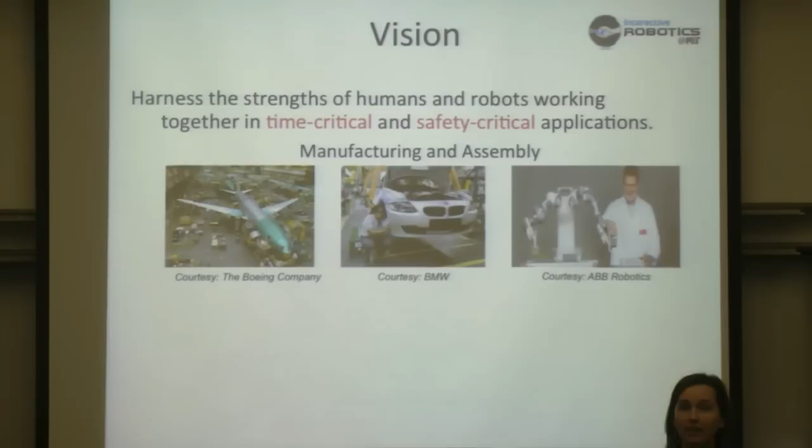What we do in my group is algorithms. We do planning, decision-making, and control algorithms. And what we specialize in is how we modify those algorithms so that these robots work more effectively and more naturally in an interdependent fashion with people. And so we do our work in two primary applications. The first one, which I'll be talking about today, is in manufacturing and assembly. This is integrating robots onto factory floors to work with people to improve the efficiency with which we build large commercial airplanes, do final assembly of cars, as well as smaller assemblies such as electronics.

And the other main area we do work in is in reducing the burden of deploying robots for disaster response applications. And today I'll focus primarily on the manufacturing and assembly applications because what's happening in this space is wild. When I tell people I'm doing work in industrial robotics for manufacturing, people typically look at me in one of two ways. Either their eyes glaze over and they say, we solved industrial robotics in the 80s or before, and there's nothing going on in this space. And the other half of the people see what's happening here, as many of you do here as well. And what I want to do is tell you about the special challenges and the incredible opportunity here.

So who has seen or been in a factory? What sort of factory? The automobile industry, okay. And if you were to guess which industry is the most successful at deploying robotics and automation, it would be which industry? Okay, the automotive industry. What was that? Ballpoint pens. Oh, so it turns out things like placing chocolates. I mean, about 90% of the work of placing chocolates into little cups is done by robotics today.

The automotive industry is typically thought of as one of the more successful industries at deploying robotics and automation. A little known fact is that only about half of the work done to assemble a car today is done by robotics and automation. The other half is the final assembly of the car, so that's putting in the seats, the insulation, the wiring, and that half takes up half the factory footprint and half the build schedule. There are a number of other industries that are lagging further in the introduction of robotics and automation.

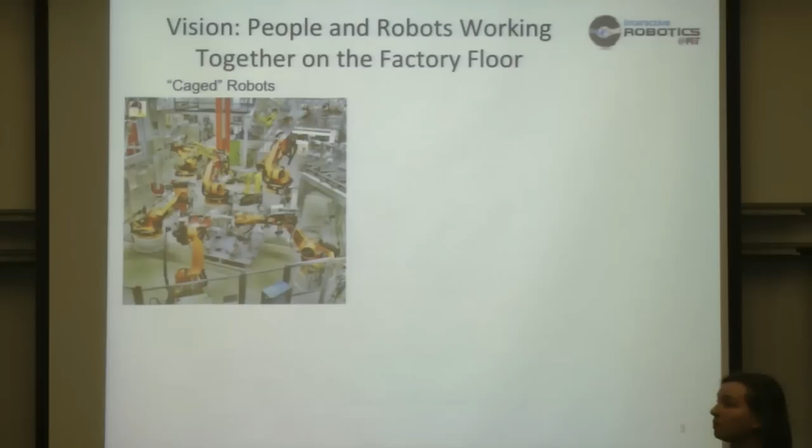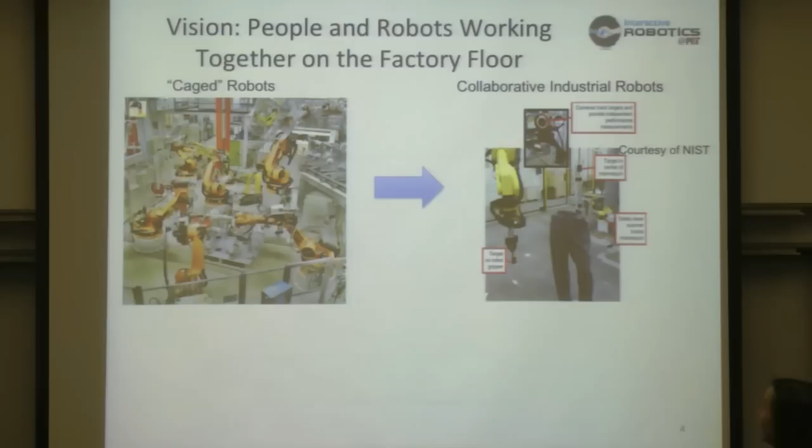Factories of the near future are going to look very different than the factories we're used to seeing today. One of those reasons is that we're beginning to see safety standards and technical specifications to, I kid you not, put these large, dangerous industrial robots onto mobile bases and rails and have them move and work in the same space as people. We still need to maintain safety, but rather than doing that through a physical barrier, we're doing that through sensing and computation. So we sense people in the space, and we slow and we stop the robot as a person approaches it. So this is an exciting new trend in uses of what are standard industrial robots.

At the same time, we're seeing the development of a fundamentally new type of industrial robot hardware, and these are being called inherently human-safe robots. I prefer the term mostly not dangerous because they can still hurt you. But the idea is that they can work next to you, elbow to elbow. They can hit you without permanently harming you in any way and without that external infrastructure of the extra sensing and the extra computation to make this safe.

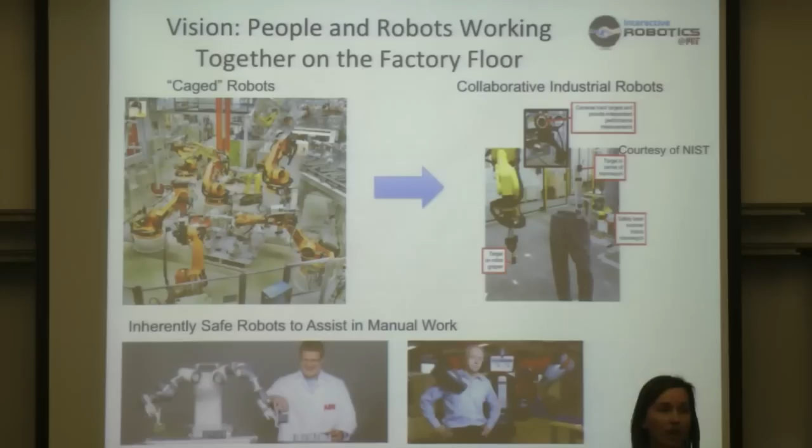So what I'm interested in is not how we make these systems safe, because that's ongoing work, but how we can take maximum advantage of the new flexibility afforded to us by these systems. Given we're beginning to understand how to do this safely, how do we deploy a robot? How do we task it, schedule it? How do we enable it to learn about how to work with people in a way that meets the safety standard, but improves the efficiency of the interaction? So that's the goal.

We work on this problem at two levels. One is at the higher level. How do we do dynamic sequencing and scheduling of work across a factory, where some work is done by people, some work is done by robots, there's precedence constraints. And wherever we have manual work, we have process time variability. People don't always do things the same way or in the same amount of time. On the other hand, we also have a challenge of how we put robots to assist in manual complex tasks more on the elbow-to-elbow side.

And what I'm going to do is talk about these two levels, one at the factory level and one at the human-to-robot one-on-one level, in terms of how we can support three facets of teamwork, three elements we know that make highly productive and effective human teammates. So what we want here is we want to be able to develop robots that can coordinate to adapt to disturbance in these environments, with the understanding that humans are the ultimate uncontrollable entity. We can't control what they do, so we want to be able to adapt.

A lot of the work that's done in these domains is codified through procedures, but much of it isn't actually. And I'll talk a little bit about that, about my observations out at Boeing. And what we need is a way for these systems to extract implicit domain knowledge from the human teams, from the environment, in order to be able to work more effectively with humans. And we also want them to be able to learn team fluency through experience and practice, so get better and better as they develop better statistical models of how humans behave.

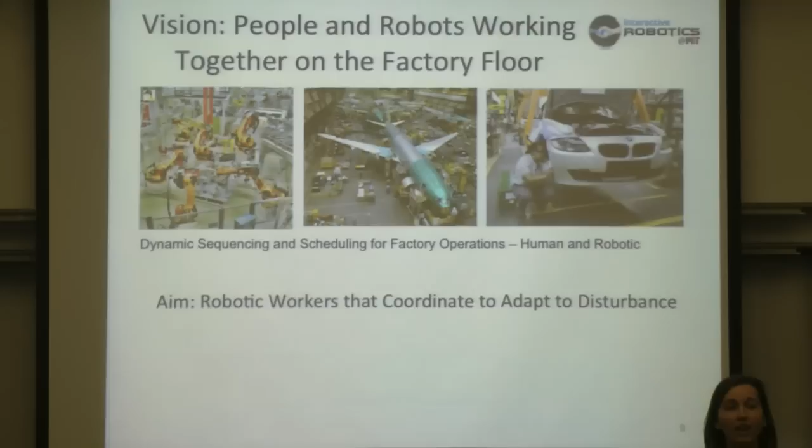So we'll start with the first one. How do we develop robot systems that are able to coordinate to adapt to disturbance? This is a computational challenge, what's underlying this. And the motivation for this is, why do we want to be able to have robot workers that adapt to disturbance? Well, ideally, if we want a factory out at Boeing to look more like most of the automotive factories we see, we'd want to replace all of these human workers with robotic systems. The truth of the matter is that's a long-term goal, 20 sort of plus years. In the intermediate time, we can begin introducing robots to do some of this work.

But the people are not keeping to a fixed schedule. So when a part is late, when rework needs to be done, people talk to other people to decide how to continue on. What we have here now is an integration issue. We have people changing the sequence and scheduling of the factory work. And what we need are robots that are able to take as input those changes and adapt their own sequencing and scheduling in response to these changes.

And so what we want is to move away from the systems we currently see, which are multi-robot cells. When a person needs to come into the cell, that entire cell is shut down for the duration the person is in it. What we want instead is for a person to be able to request to come into a certain space for a certain amount of time. For example, say I need the left half of the fuselage for a half hour. And what we want is for the robots to take in that constraint, to retask, resequence, and reschedule their work so that they can still continue to make progress despite this unanticipated disturbance.

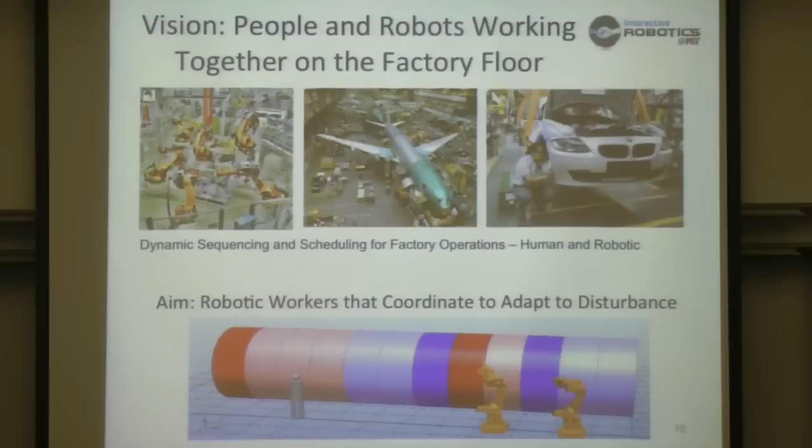So what are the real-world near-term applications for this? I can tell you about a few in aerospace manufacturing. So this is an industry where, as I mentioned, maybe 70 or 80% of the work is still done manually. That remaining work that's done by automated systems is typically done by what's called monument automated systems. They're called monuments because they're huge structures. They take up a large part of a room. They're fixed to the factory floor, and the parts come to them. And so these systems are used for drilling large aerospace structures and for composite material placement.

Drilling is a big deal in aerospace. A 747 requires 1 million holes to be drilled during assembly. Much of that is still done by people. When it's not, it's done by the system. So what we're seeing is a trend moving from these monument systems to more right-sized, reconfigurable robot systems. So these are robot manipulator arms with highly specialized end effectors, and they can move to the part. And what's nice about this is we can now get multiple of these robots on a wing or on a fuselage laying down composite material placement or drilling.

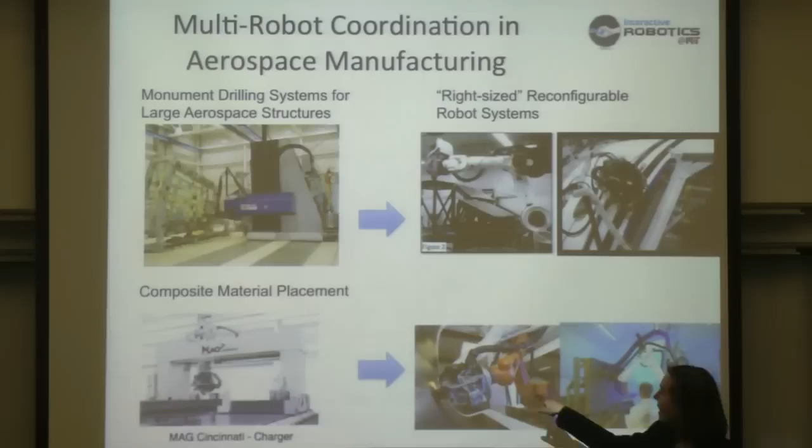One of the challenges with this technology: the robot arms never break, but this here tends to, it's newer technology, people need to come in, quality assurance needs to come into the space, so the interruptions are frequent. What we want is a system that's able to dynamically recompute task assignment and schedules in response to this input from supervisors or operators that want to change the schedule. And the proprietary methods for relatively small multi-robot cells may take a half hour, an hour, or multiple hours to recompute these schedules. And that's OK if it happens occasionally. But when it happens multiple times in a shift, we have a problem. So what we want are faster techniques to be able to compute these task assignments and schedules.

We want to be able to take as input a temporal plan, which involves the tasks to be executed, expected times that they take, minimum, maximum times that they take. We want to be able to take as input precedence constraints. One task or process needs to happen before another. Typically, there are temporal constraints as well, upper bound and lower bound temporal constraints. An upper bound window that certain work needs to be done in first shift or within a certain time a tool is available. We typically have lower bound temporal constraints as well, called wait constraints. An example of this is we need to wait a half hour for one coat of paint to dry before we lay down another coat of paint.

And we have different agents, different robots, which can perform the different tasks, as well as a spatial configuration at which the different tasks are performed. And we typically have space-based constraints, such as spatial proximity constraints. People and robots can't be too close. Two robots can't be working in the same area at the same time. What we want is to be able to optimize this work-sharing problem of this multi-robot system as a function of completion time, information on robot reliability, history from previous runs, and changing input from the human operator.

And the goal here is to be able to update the schedule quickly in seconds so that we can have a system that's more interactive and that can overcome these schedule disturbances. So this is a task assignment and scheduling problem. It can be readily formulated as a mixed integer linear program.

The challenge of coordinating multiple robots operating in the same physical space is that we have very tightly coupled constraints: upper bound constraints, lower bound constraints, and spatial constraints. These constraints are tightly intercoupled, and they don't really lend themselves to the typical techniques for scaling to large sizes, decomposition techniques. And that's because we typically can't get informative cuts through the search space.

The intuitive reason for this is that each agent's contribution to the objective function is coupled to the other agents' task assignments and sequences. So the particular allocation and sequence of one agent affects the goodness of the allocation and sequence of the other agents. And that's a characteristic of working in the tight physical space.

So UAV tasking and scheduling of aerial vehicles typically can use alternate techniques. You can decompose, for example, space and time. You can say within a sector, a certain agent is going to do work, and then let's sequence the work for that agent within that sector without it really impacting the work of the other agents. This is one example of a technique that won't work here. So what we observe is that in this problem, we need to leave time and space intercoupled, but we decompose the problem in an alternate way.

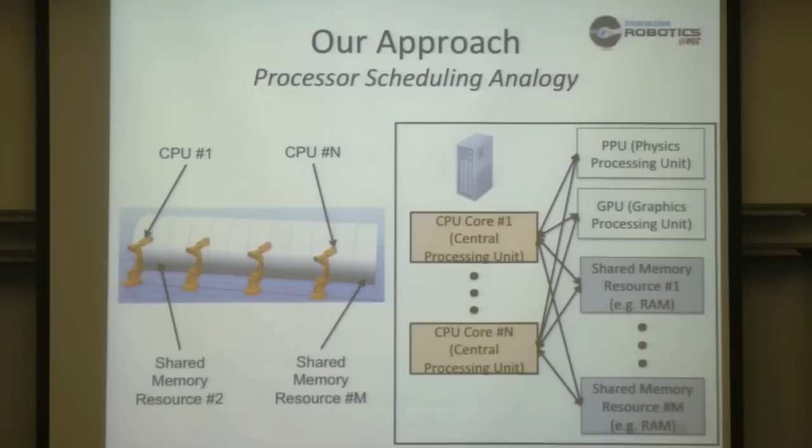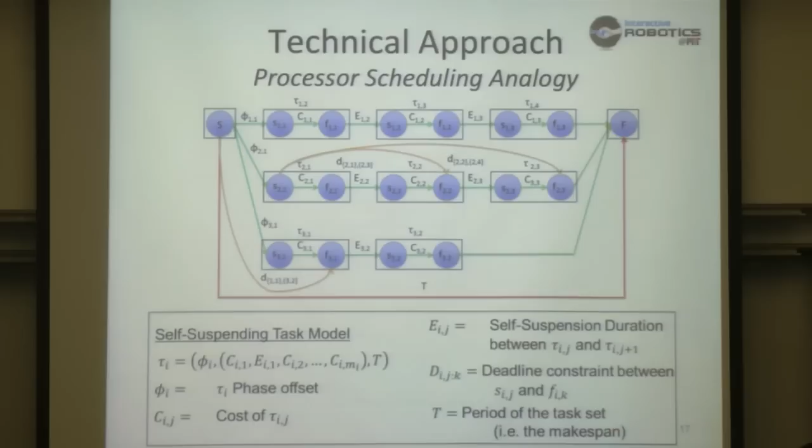So what we do is we map the manufacturing task to this self-suspending task model. And we aim to develop a polynomial time satisficing schedulability test for this task set. So what we want to do is put in this task set and get a very quick answer: yes, I can schedule it, or I don't know if I can schedule it. That's all we can get if we're going to do it in polynomial time.

The goal is to make this test as tight as possible, to reduce the frequency of times we get back this I don't know. And so this is a technique or an approach that others in processor scheduling work towards.

And this problem of scheduling or testing the schedulability of a self-suspending task network has been studied for restricted problem structures. So the way these techniques work is they restrict the behavior of the scheduler and then leverage the problem structure to be able to compute this tight bound. So you can restrict the behavior of the scheduler in multiple ways, but then you need to leverage the problem structure. So the particular problem structures that have been investigated previously and have been solved look like this.

We have one task, which is composed of a number of precedence-related subtasks, and then we have a whole bunch of free tasks. So our goal here is to figure out how to interleave each of these tasks within the wait durations of that upper task with its various subtasks. So you only have one task with subtasks, and then everything else is free, and that's your flexibility to try to figure out how to interleave and develop a tight test. So this has been solved.

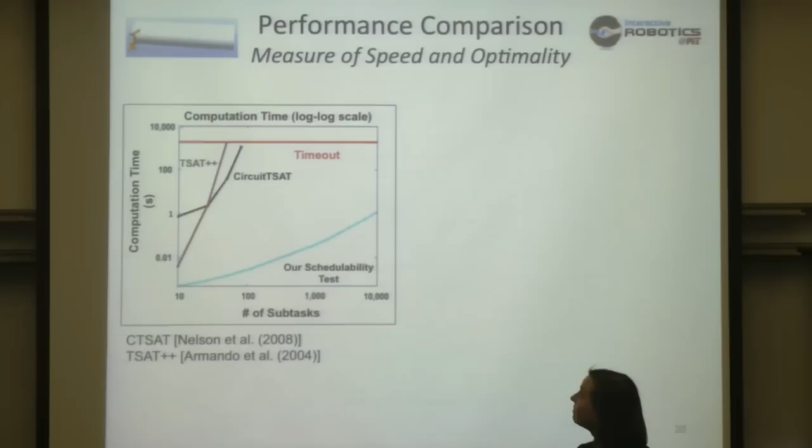So here we're benchmarking this schedulability test against SAT solvers, circuit SAT, TSAT++, just to give you a sense. Those are complete solvers. Typically, these will time out at somewhere around 100 subtasks. And we can test the schedulability of task sets with up to 10,000 tasks, usually in about a second. And to our knowledge, these are problems that were not solved previously. You don't get something for nothing, though. And what we lose here is optimality.

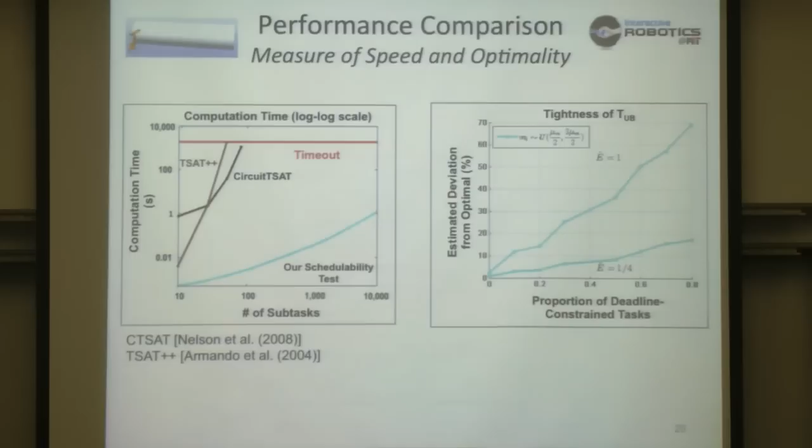So for this set of problems which we can solve optimally, for example, here the optimal is to minimize the makespan, which we have to solve using different techniques. What we can show is that if about 1/4 of our temporal constraints are these lower bound wait constraints. Remember, these are the hard constraints. If only about 1/4 of them are wait constraints, empirically we can achieve within about 10% of the true optimal, which is quite good for the applications of interest to us.

So now we want to extend this from a single agent to multiple agents. This is a single processor, no shared memory resources. So now we want multiple agents and we want shared memory resources. And this is doing a worst case analysis of all the interleavings. Once you extend this to multiple agents, it becomes highly conservative. So what we do is we take this schedulability test, we turn it into a tight schedulability test and embed it within a scheduling simulator.

So whenever we're about to make a scheduling commitment, we run this test and say, can we at this point make this commitment? And what that allows us to do is reduce the uncertainty with the commitments made so far and produce a less conservative schedule going forward. So what we do is we take this schedulability test and we embed it as a subroutine within a standard mixed integer linear program solver.

We use Gurobi for solving the agent allocation problem. We produce an optimal agent allocation according to a heuristic optimization function. We throw that to the sequencing subroutine. We say, can we solve it? If not, we iterate back to the next agent allocation. We go back and forth until we find one that meets our schedule constraints.

So when we put this to a multi-agent system, again, scheduling through simulation, what we're able to show is that we can schedule up to 10 agents. We've extended this out to 100 tasks, usually within about 10 seconds. All prior state-of-the-art techniques we've looked at and benchmarked against pretty much time out. Here we're doing a timeout of 30 minutes for 4 or 5 agents, about 50 tasks. So we can solve much larger problem instances.

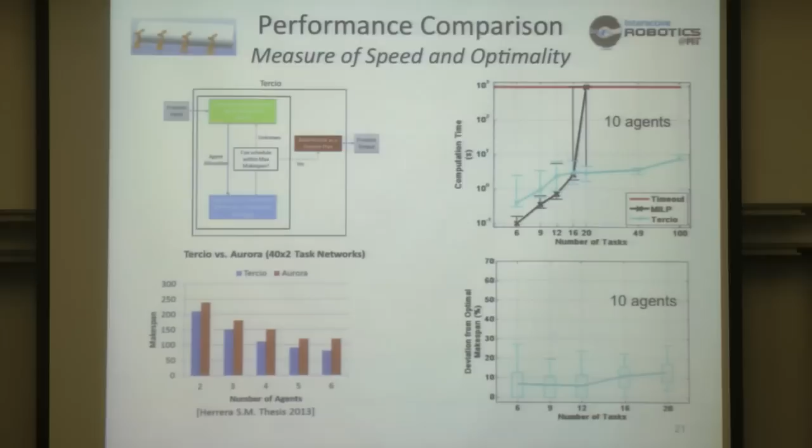And again, we can show for the multi-agent case, as well as for the single agent case, that we can produce solutions that are within approximately 10% of the optimal for the size problems we can benchmark against. We've also benchmarked this against proprietary solution techniques as we were able to. These are for smaller task sets. What we can show is that compared to other heuristic proprietary scheduling techniques, we typically produce schedules which are at least 10% better than these other techniques.

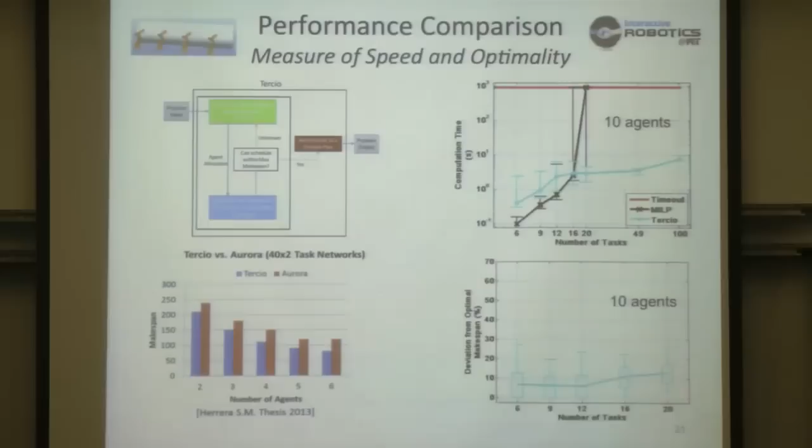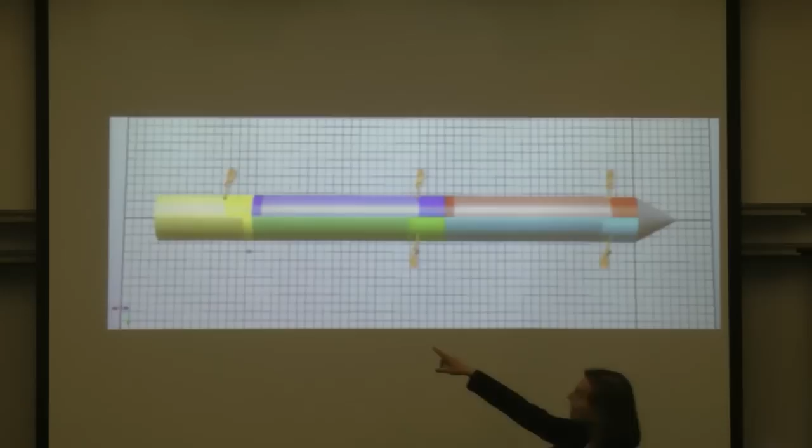So the goal here is to use this as a capability for developing robots that can adapt to disturbance more the way people do. And so if we show you what a large-scale demo looks like, to give you an imagination of what a factory of the near future will look like, here we have a 5-agent task set, about 110 tasks. A person is requested to come into the space, so the robots have reallocated, resequenced, rescheduled their work. That top robot breaks down. The colors are showing you how the work is being redistributed.

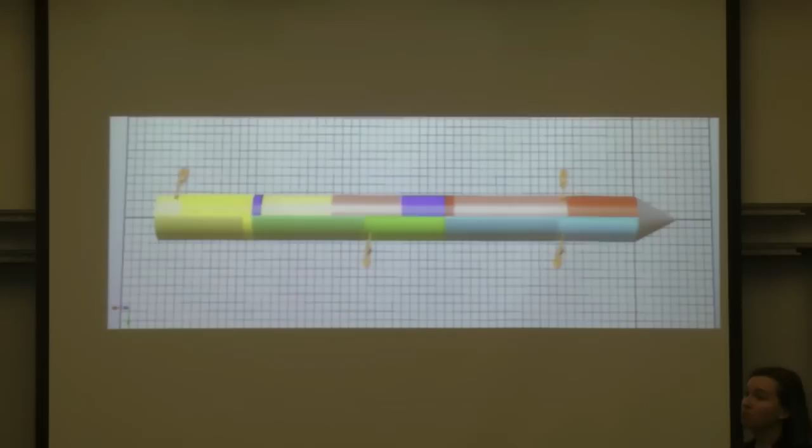This allows interactivity, so a supervisor can change and, for example, accelerate deadlines on a part of the task set. And here, the upper part of the fuselage needs to be finished sooner, and the agents reallocate. This is a problem that would have taken hours to solve previously. Boeing Research and Technology is the sponsor of this. There's IP associated with this, and excited to report that it will be implemented on a factory floor in the near future.

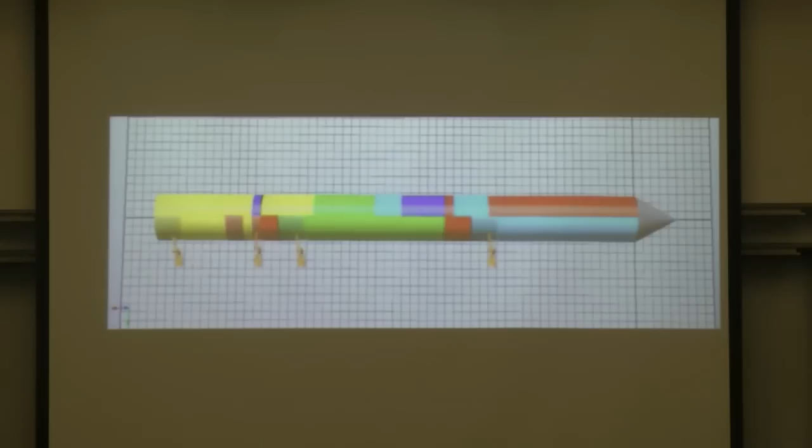And so what we're doing now with this project is two things. One, this is for a single cell in a factory. You can imagine a single cell where you're building up a fuselage, but this large factory is composed of multiple cells. So how do you scale this up in a hierarchical fashion and ultimately distribute it to take advantage of the natural decouplings in the different cells? We want to be able to trade robots between cells, so when one robot goes down, we can pull a robot from another cell in an intelligent fashion.

The other avenue for this work going forward is looking at applying this to more typical assembly lines, for example, automotive assembly lines, how we can do dynamic sequencing and scheduling of work on, for example, automotive final assembly. And because I have a human factors engineering background before I did AI, I know that the fanciest algorithms are only useful if they are easy to use. So we conduct human subject experiments with these algorithms to understand how a person should interact with them.

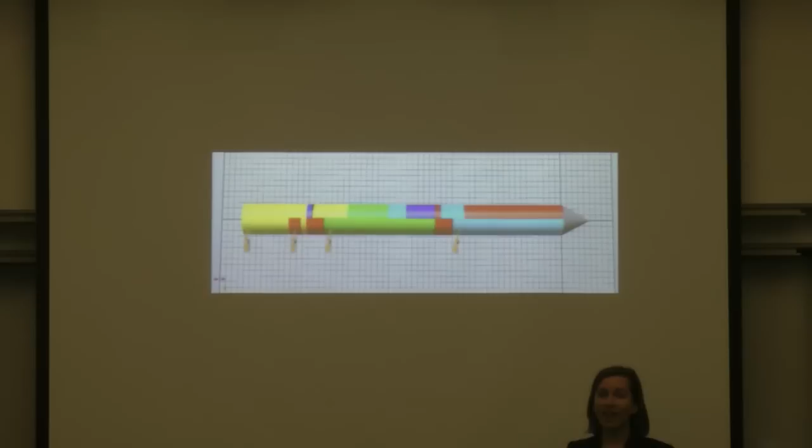And in particular, what does it mean if a person is doing some of this work? The robots are getting real-time updates on the schedule of the work that people are doing, and then the robots are resequencing and scheduling their work differently from day to day and shift to shift. What the robots are going to do is going to look different to a person, and that has implications for acceptance. It has implications for shared situational awareness on the factory floor, which are very important to the acceptance of this technology ultimately. So that's a briefing on some of our work in terms of how we're thinking about the computational challenges of coordinating robots to be able to respond to disturbances in a timely fashion.

That's not good enough, though. And the reason that's not good enough is because from my time on the factory floor, this stunned me. But anybody else who works in manufacturing is not stunned by this. The plane is actually built differently from day to day and shift to shift. Who would have guessed that? I wouldn't have guessed that. And the reason is that important parts of the process, such as tolerances, are well specified. But wherever you have manual work, you have people tailoring the manual work.

And in this case, you have a team of people working together. And they develop their own style, their own sequence, their own ordering of the work. And so in order to be able to use this sort of scheduling software, we really need to do a good job of being able to extract domain knowledge, human domain knowledge from natural human workflow, and potentially use that to seed the schedules that are produced so that they're in a space that makes sense to people.

We also want to be able to pull information about how people are reorganizing the work on their part of the process and use that as input to these automated schedulers. And so what I'm going to do is talk a little bit about how we're thinking about extracting domain knowledge from natural human workflow. So this has applications for automated scheduling. It has applications for other areas as well.

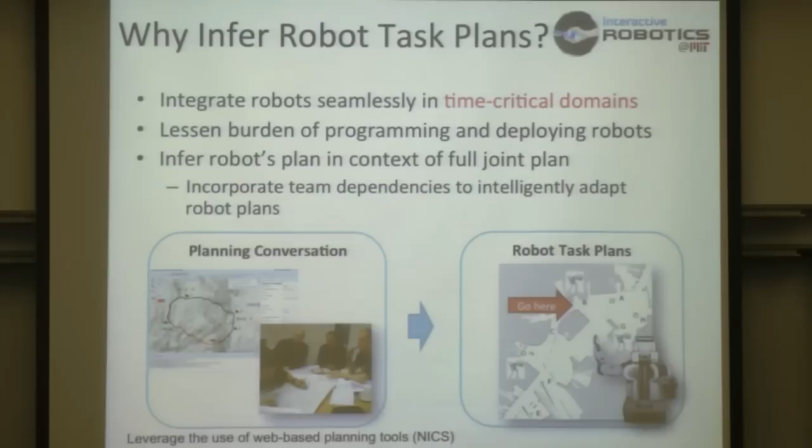And so one of our secondary motivations here is to think about how we can observe natural human-team planning conversation and automatically translate that into a robot task plan that understands the interdependencies of the teamwork and can deploy as a part of the team. So this is looking kind of further out in terms of time horizon for technology.

And so what we do in this work is we take in conversation data of teams planning a scenario. And we're not solving the natural language processing part of this problem. That's multiple PhDs in and of itself, and my lab doesn't do much in natural language processing. So what we do is we manually code that raw planning conversation into a structured form for each utterance in the planning conversation, like a machine understandable form. And we take that as input.

And what we're aiming to do is take that as input and infer the finally agreed upon plan that the people agreed to. This is a difficult problem. And I want to underscore the difficulty of the problem from the human subject experiments we conducted, where we watched people plan and log their data to be able to analyze and to use in these techniques.

We gave people this simple task. We have 5 rooms on the floor. 3 rooms have patients. The other 2 rooms have leaky valves. A robot needs to inspect each room before a human crew can enter. And the goal here is to triage all patients, fix all valves, and inspect all rooms. We had 44 teams of 2 people log into a tool to plan for this scenario in a chat window with each other. And of those 44 teams, each team produced a unique plan.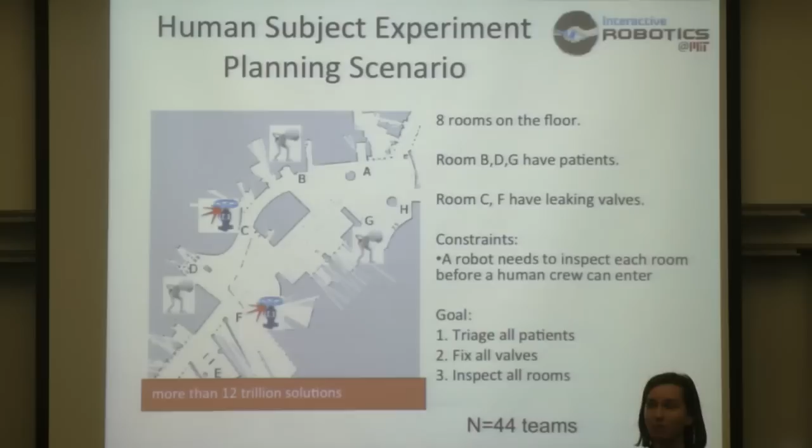So, what's more, about 80% of each team's planning conversation didn't make it into the finally agreed upon plan. So we have a significant noise rejection problem here. I want to show you a video of 2 of the teams reading their transcript afterwards from their planning session so you can get a sense of what the planning conversation looks like.

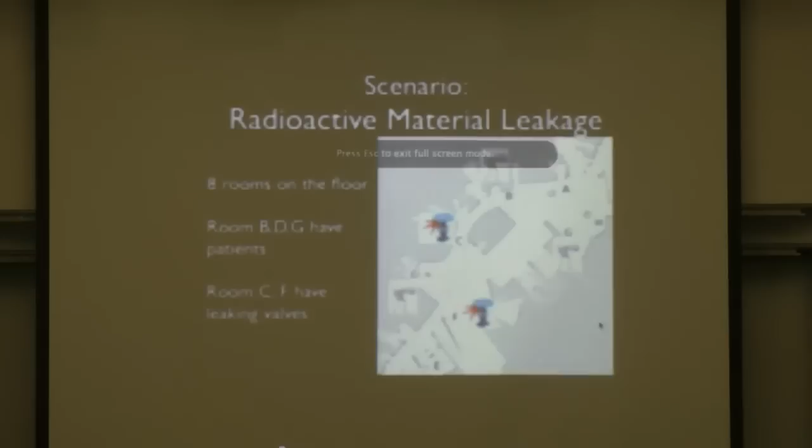OK, this is good. So this is the scenario. I think we should plan to have as many people working at once as possible. Divide the whole space and send red robot to check room A to D, blue robot to check H to E. Wait, but then we have one time step where A and H are being checked, and there is nothing for the other teams to do. Partition is good though. So how about...

So, ooh, I have to try to find my PowerPoint.

Here we go. OK. So the characteristics of what we take as input. What we're taking as input is, at the utterance level, we're taking in relatively ordered, noisy plan parts, represented as grounded predicates in this case. So at the utterance level, we're coding that as, first let's do A, then C. So we have A and then C, which are locally ordered here. Then we should do D and E together. So those occur in parallel here. Great, we can do H after that.

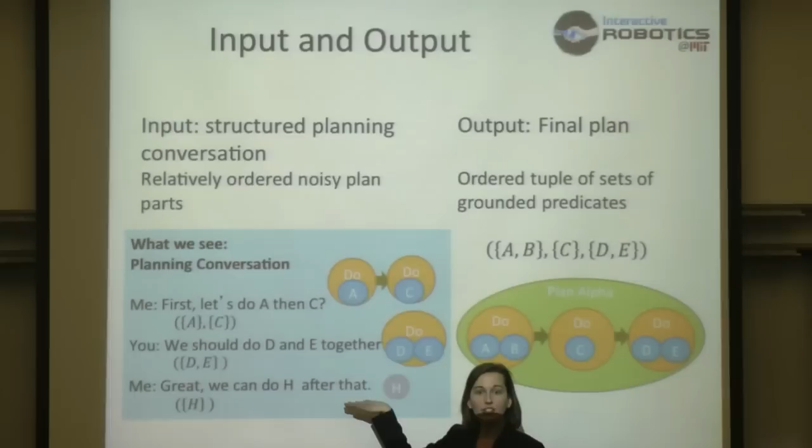Even though we see this as H after that, we code it based on each individual utterance. So this just shows up as an H. And what we're looking to do is infer the finally agreed upon plan, which is the fully ordered set of grounded predicates as they appear in the final plan someone would write down that they believe they agreed to.

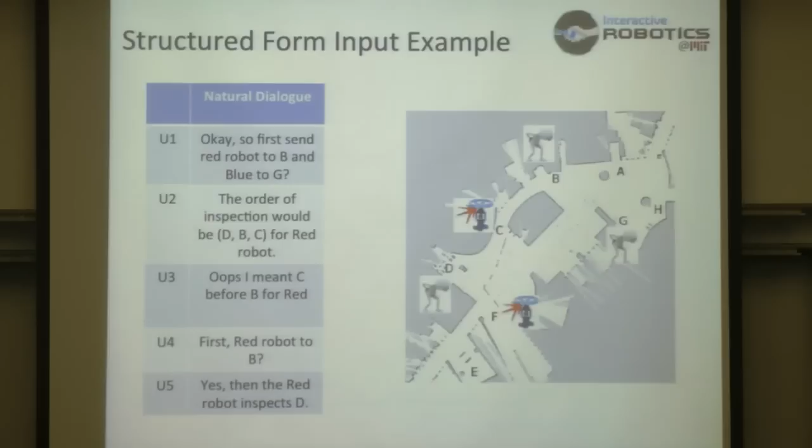And so even though we manually tag this data into a structured form, it preserves a lot of the very difficult characteristics of human planning conversation. We have changes of plans, we have typos, we have, based on the nature of how we're tagging it, temporal relationships that are lost. Inference in the solution space is large, so there's at least 12 trillion possible plans. And as I mentioned, each of the 44 teams produced a unique plan.

The conversation is succinct. We have suggestions that violate constraints typically, and much of the conversation doesn't even end up in the finally agreed upon plan. So how do we approach this problem? What we do is we propose a generative modeling technique, and we integrate logical components into the generative modeling technique to provide structure over the prior possible space of plans to improve the efficiency of the inference.

And what this allows us to do is perform inference over this very large solution space with what's really a relatively small amount of noisy data. And what we can show is that we can actually successfully infer the finally agreed upon plan in terms of correct sequencing and task allocation with up to 90% accuracy.

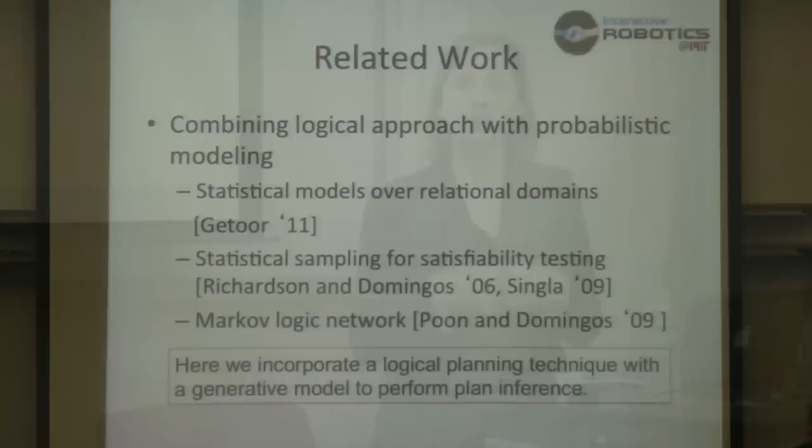And so this is related to a growing body of literature aimed at combining logical approaches with probabilistic models. We've seen work in statistical models over relational domains, Markov logic networks, for example. And here what we're doing is we're specifically incorporating a logical planning technique, plan validation, using a PDDL style plan validator to provide this structure over the prior in the generative model.

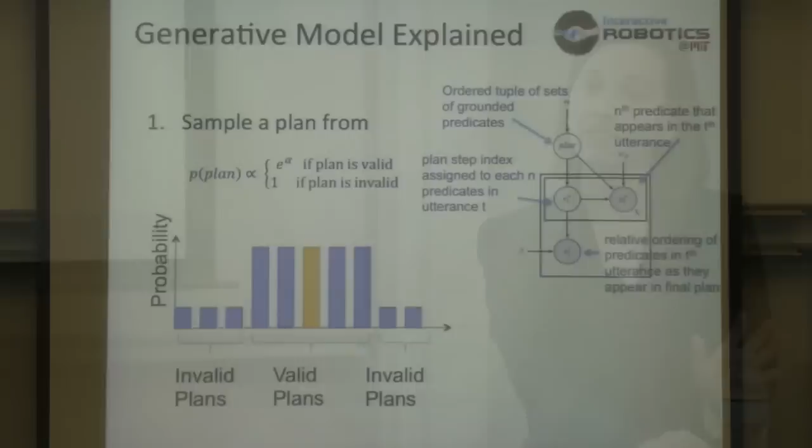So we design a generative model. And the way we do this is, as I said, we shape the prior probability over this plan space based on whether a particular plan is valid or invalid according to those constraints. And we don't completely disallow invalid plans, because actually many of the times people are agreeing to what are invalid plans. So that's very important here. And this technique provides you flexibility to infer those plans which may be invalid to some of the constraints.

And we shape this prior probability using a PDDL plan validator. We're using the variant of PDDL 2.1 here. And what we take as input are the available actions, the preconditions, postconditions, the available resources, the initial condition, the goal condition, a candidate plan. And then our output is yes, this is a valid plan, or no, this is not a valid plan. And we're using this as a part of the scoring in our sampling step.

And to do this, we use a combination of Gibbs sampling as well as Metropolis-Hastings sampling. And we have to do MH sampling because what is the problem with sampling the plan space? There's no obvious conjugate prior, and it's intractable for us to calculate the normalization constant. So for this fictional rescue scenario, this is a simple one. We also did a second one as well.

What is the outcome? So by shaping this prior distribution over the plan space using knowledge of the structure of the planning technique, we actually are able to significantly improve the inference of the final plan. So on average, on that first line with PDDL, we were able to get 91% of the plan correctly. In the task allocation, 84% of the allocations of agents to tasks is inferred correctly, and we have 100% noise rejection. That's that 80% that doesn't end up in the finally agreed upon plan. With no plan structure, this average accuracy drops to 82%.

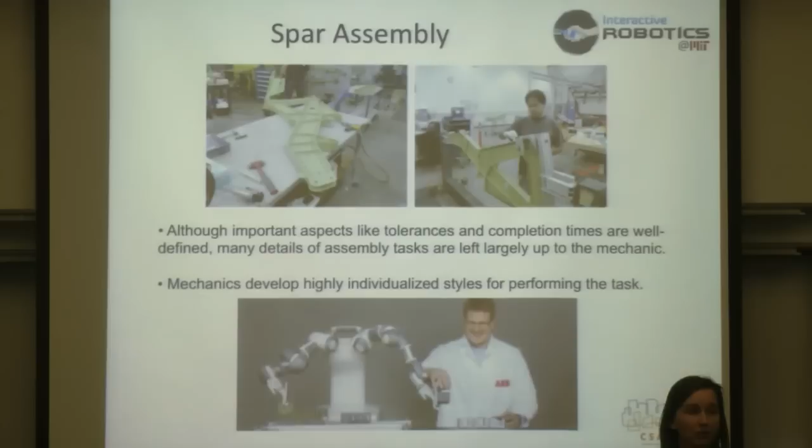Okay, what I'd like to do in the few minutes I have remaining before I open it up to questions is just touch on some of the challenges of learning team fluency through experience and practice. As I mentioned, wherever we see manual work, we see individualized styles for performing that work. And that poses challenges for tasking a robot to assist a person side by side.

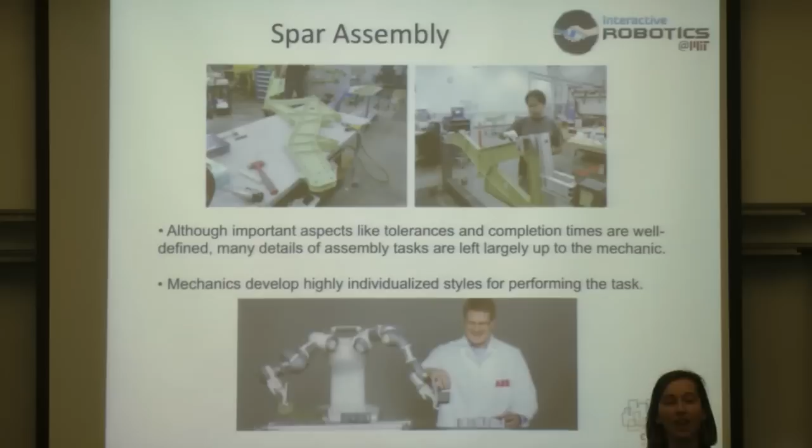Because if we program a robot to work with one person, that doesn't necessarily mean that robot will work effectively with another person. And so what we want to do is be able to develop individualized models, for example, a statistical model of human behavior, and then use that in the robot's own task plan to figure out what actions to take, and what order to take those actions in, and then how to schedule them.

The safety standards for human-robot collaboration with industrial robots look something like this. So this is an implementation in our lab. They require that the robot slow and stop as a person nears the robot. So you can see as a person comes into space, the robot slows and stops before it makes contact.

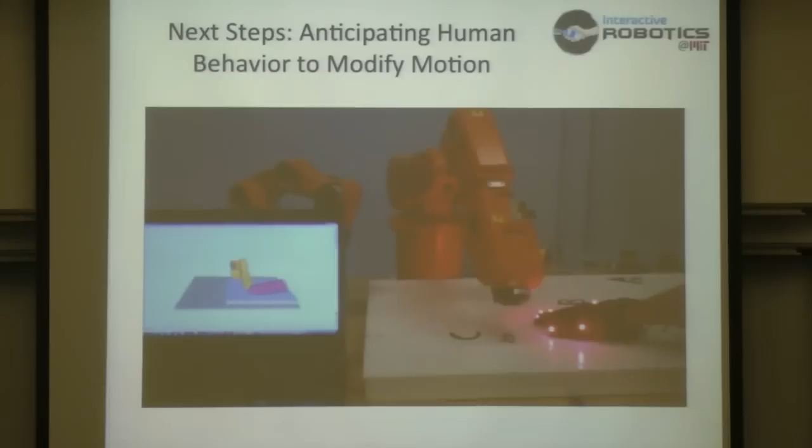One of the challenges with these safety standards is that this robot is performing a pre-sequenced set of actions, and if the person happens to be in that space, that robot will just stop for a long while, right? And it's not taking into account knowledge of where that person will be next. So while we want to maintain the safety standards, what we want to do is be able to add a little bit of anticipation in this robot, a little bit of understanding of where that person will be, so as to improve the efficiency of this interaction.

That's the goal. And the way we approach this is to try to take insight from how human teams learn to work together effectively over time. So a gold standard technique in human team training is something called cross-training. That's where people physically switch roles and take someone else's job for some period of time. They do this in the factory, aviation crews do this, military tactical teams do this. There's a practical benefit, for example, in the factory. If someone is out sick, someone else knows how to do their job.

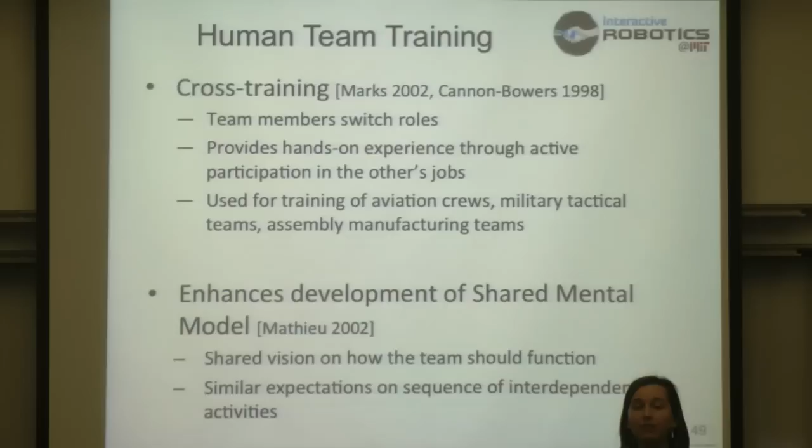But there's another benefit, which is empirically developed in the literature, which is that it enhances development of shared mental models. So something about actually taking someone else's job allows you not only to learn how to do your job, but to learn about your partner and what they need to do their job effectively. And you bring that knowledge back with you to then do your job not only better for yourself, but better for your teammates. And enhanced shared mental models, through cross-training, also show a benefit in off-nominal circumstances when things don't go according to plan.

So what we noticed, or what we thought, was that many of the techniques we use to train robots are really focused on one-way transfer of information from the person to the robot. That does not look like human team training techniques. So for example, training a robot through interactive reward. The robot does something, you say good, the robot does something, you say bad, and it learns over time. That's transferring one way from the person to the robot. That is actually documented as among the most inefficient techniques to train a team of people to work together.

So we just thought as a hypothesis, what if we were to take a standard interactive reinforcement learning algorithm and modify it to take its inputs through cross-training with the person? Same inputs, but through a different mechanism. Not only do we support the robot's learning, but we now also support the human's learning of how to work with the robot.

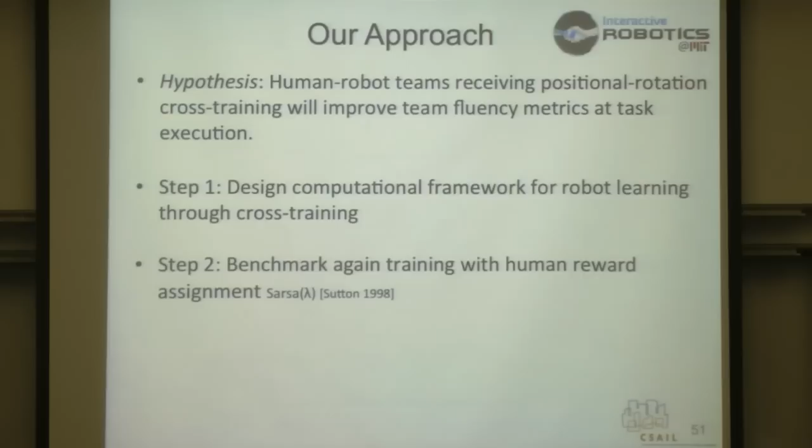And maybe that leads to better team performance. And in our experiments, we do have a number of exciting statistically significant results. So our hypothesis is that we can improve human-robot teams, we can improve their execution if they receive their training through cross-training rather than through, for example, in this case we use Sarsa Lambda as our benchmark. So we designed a computational framework for robot learning through cross-training, and then we compared it to Sarsa Lambda.

What we did was conduct large-scale human subject experiments. We had 36 people come into the lab and trained to work with the robot in a graphical user interface environment. So we had half the people come in and train in cross-training, half the people come in and train through interactive reward. In cross-training, people and robot would physically switch roles. In interactive reward, the robot would do something and the person would assign a reward.

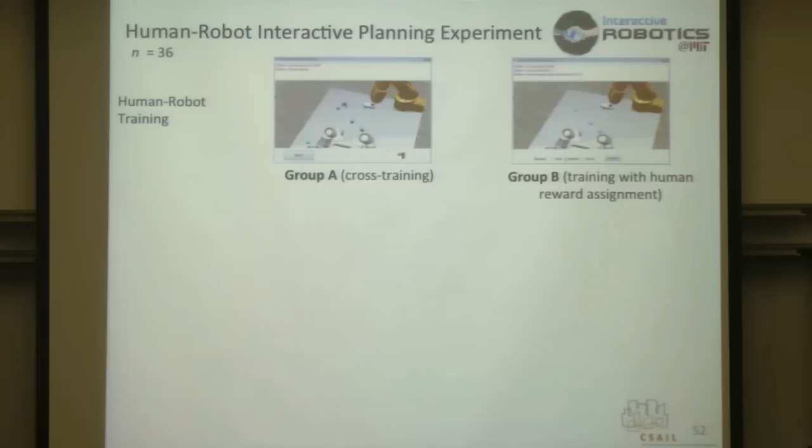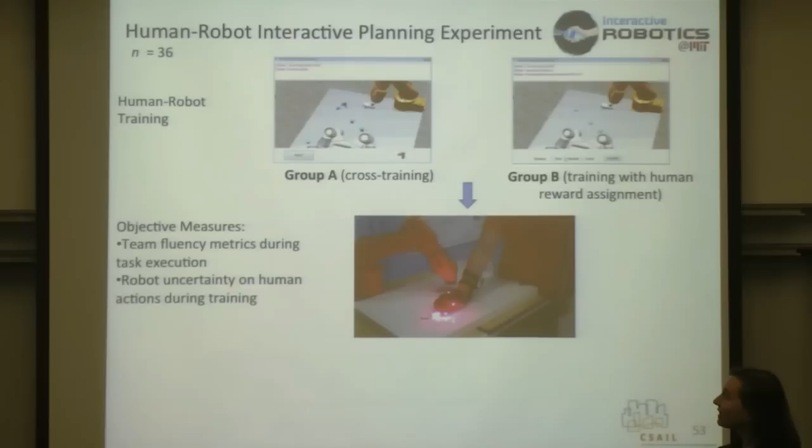What we then did was, for the first time, we had the person go and work with the real robot. And we measured objective measures of team fluency, as well as the robot's uncertainty on actions of the human teammate, and then subjective measures of team performance as well. And we did those subjective measures through a post-experiment questionnaire. So I'm going to show you two quick clips before I show you the results, so you can see the quality in the difference of the teamwork.

The task here was a place and drill task. So the person placed 3 screws, and the robot drilled them in. The person could train the robot to work with them any way they wanted. The smart people knew that this is a real industrial robot and is very dangerous, and trained the robot to stay out of their way until they had placed all screws, and then the robot would come in and drill them. Other people were more efficiency motivated, and they aimed to train the robot to drill screws as soon as they were placed.

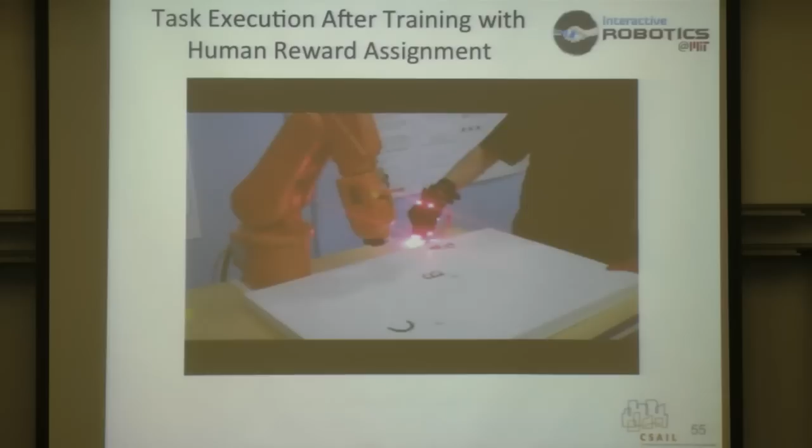So this is a video clip of a person working with the robot after they trained through interactive reward assignment. And what you can kind of see is the person places the screw and then kind of hesitates, looks to see what the robot's going to do. They don't really seem sure what the robot's going to do. And when the robot starts moving, they pull their hand out of the space. When the robot stops moving, they come back into the space. I can show you that again. I think it'll play fully the second time. So qualitatively, it seems as if the person is unsure of what the robot will do.

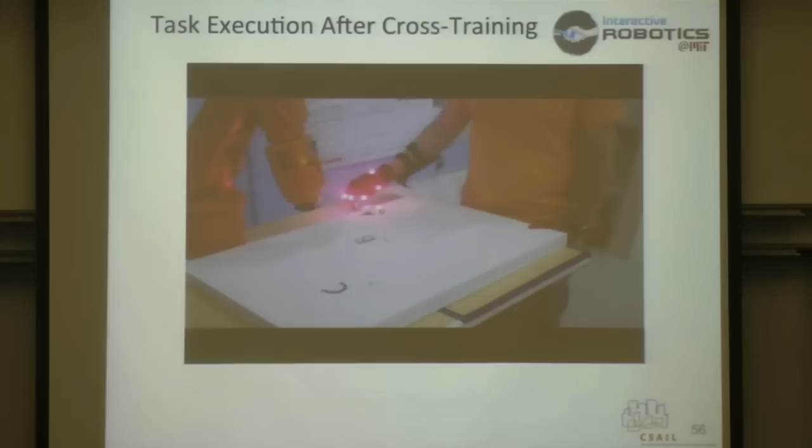OK. So this is a task execution after cross-training. And this looks pretty different. So in this case, the person places the first screw, goes to place the second screw, and stays in the space as the robot starts moving. And they finish the task. These are representative samples from the videos. What we saw was that human idle time decreased by 41% after cross-training, and concurrent motion increased by 71%. Both of these were statistically significant results. So what you see with your eyes does match up here.

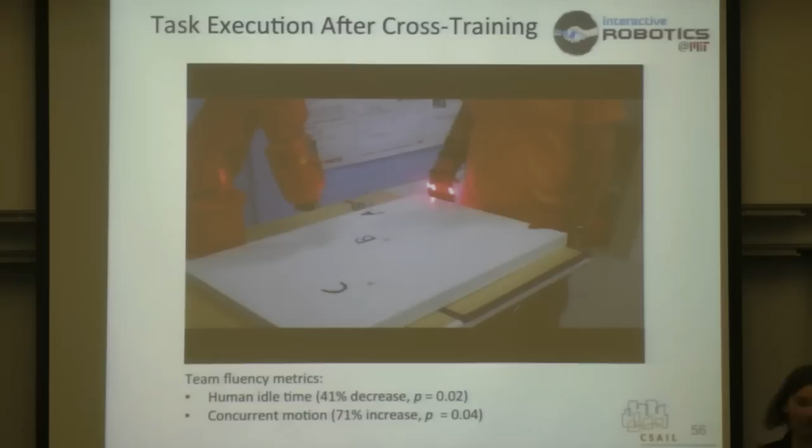We used an MDP model as the computational model for training. And so what we can measure is the entropy rate within the MDP. And this corresponds to the robot's uncertainty in what the human will do next. And that's because we modeled the human as the stochasticity in the environment. And what we can see is after the 3 rounds of training, after cross-training, the robot is statistically significantly more sure what the human will do than after interactive reward assignment.

Now, why this is another question. This could be because of adaptation on the person's side. It could be because of better learning on the robot side. The inputs are the same, but what the inputs mean is different. It's not clear what someone means when they're assigning reward, whereas when you learn by switching roles, that's potentially more informative in this context.

For the subjective measures, we saw a number of statistically significant subjective measures. And the subjective measures are very interesting to me because they're typically the most important for adoption of the technology. And we saw statistically significant differences in people agreeing that they trusted the robot. They agreed more strongly they trusted the robot after cross-training than through the benchmark. And they agreed more strongly that the robot performed according to their preference.

So as next steps, this is interesting because what this allows us to do is take these statistical models of human behavior, the robot's uncertainty in what the human will do next, and integrate it into a risk-aware motion planner to avoid the spaces potentially where the robot believes a person will be and reduce that slowing and stopping time.

And so we did an experiment in which we pretended we had perfect information on where the person would be next. We forced them to place in a certain order to be able to scope the benefits of this approach. And what we found was that when the robot used this risk-aware motion planner, the team completed the task faster and with larger mean separation distance between the person and the robot.

So what that means is we don't necessarily have to worry about trading safety and efficiency. With a little adaptation from the robot side, and if done well, we can actually achieve benefit on both those fronts. We can do the task more efficiently, and we can make it safer, arguably, by maintaining a larger separation distance between the person and the robot.

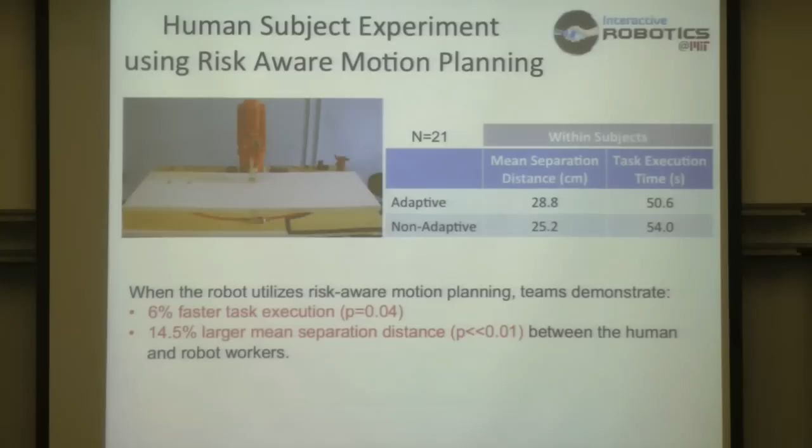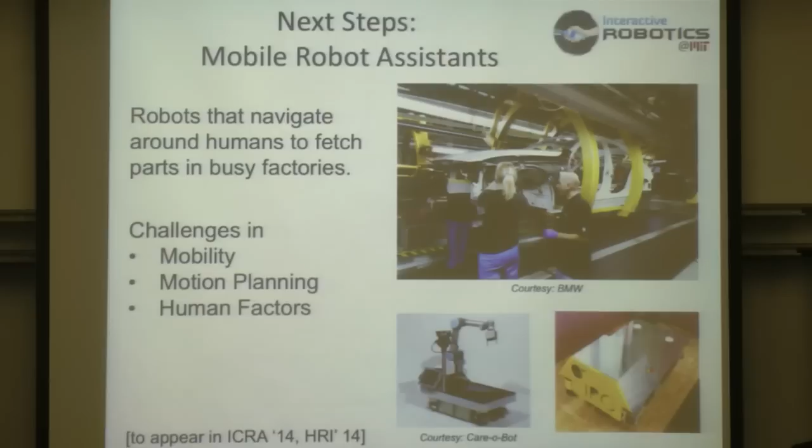So next steps, this is all with a manipulator arm. We're currently working on some of these same ideas, but in the context of mobile robotic assistants. So these are mobile robots delivering tools and materials on an automotive final assembly line. And here we have challenges just in basic mobility, the robot driving on and off a moving floor, motion planning in the same space as people, as well as the human factors of how the system interacts with people.

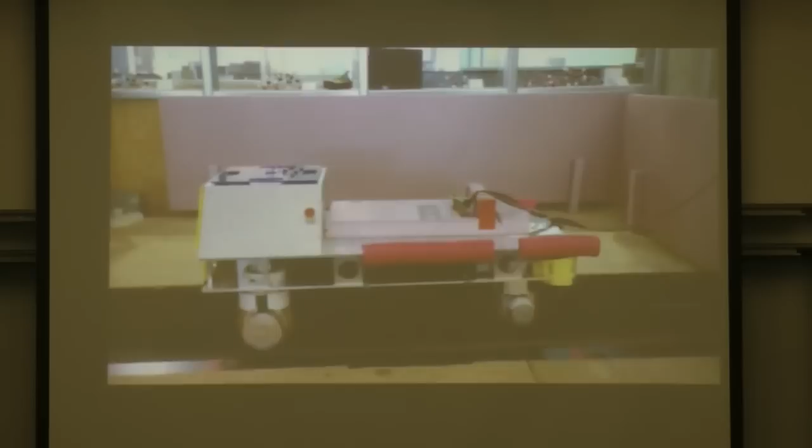But our first challenge over the last year was just basic mobility. We need the robot to be able to drive on and off a moving floor line without potentially nicking an expensive car as it crosses the line. And so that's a lower level kind of control and sensing problem, which we've solved. And so now we're moving on to deployment, proof of concept on the factory floor, and to start thinking about the system moving and navigating in the same space as people.

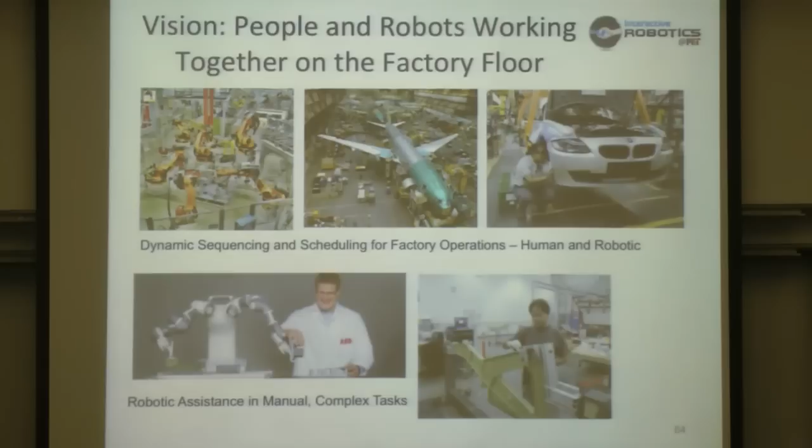So to wrap up, what I've done is talk about challenges kind of at 2 levels for factories of the future. Challenges in how we can increase efficiency of manufacturing and assembly through more dynamic sequencing and scheduling of human and robotic work. And how we can think about deploying robots that work side by side with people in a way that's individualized to that person and in a way that this robot can learn through experience and practice how to be a more effective teammate.

And through the 3 challenges, one is a computational challenge of adapting to disturbance, and the others are more specific to interacting with people, how we can extract implicit domain knowledge from natural human workflow and then learn team fluency through experience and practice. And so the overall goal across this work is that we're aiming to improve efficiency of manufacturing and assembly through strategic integration of advanced robotic technology.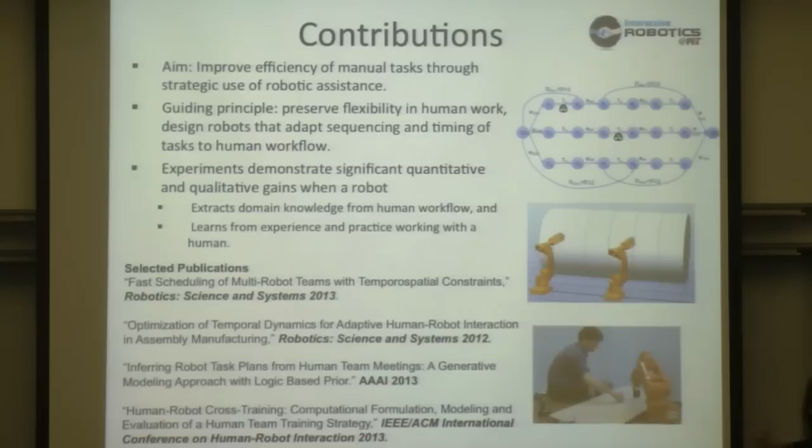And the guiding principle is that we want to preserve people to do the work they're good at and preserve flexibility for people. By preserving flexibility for people and enabling robots to be able to adapt even in limited ways, we can maintain people's autonomy, we can increase potential acceptance of the technology, and we can show demonstrated improvements in efficiency of the work as well.

And we develop algorithms. I mentioned planning, decision-making, and control algorithms in my lab. But we also conduct human subject experiments to be able to understand their potential benefit and understand that the algorithm development is providing a useful purpose.

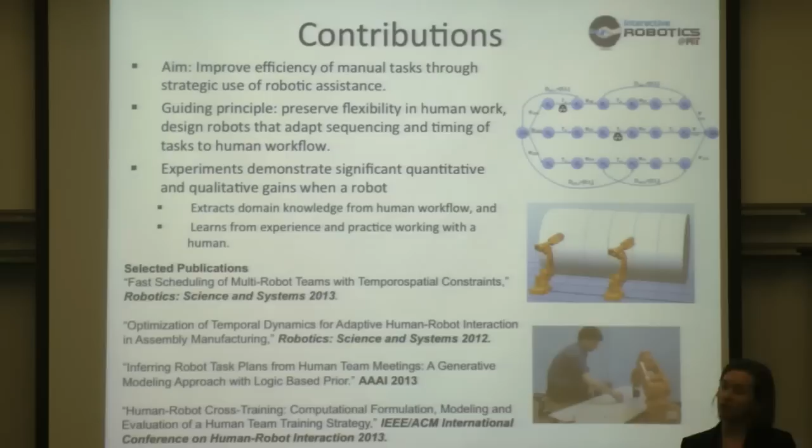That's fascinating. I didn't know you could make such a seemingly simple problem look so... In all seriousness, particularly in the last aspect, there's certain things that people will do, sort of 2 parts to this. One is that we will every once in a while goof up, we slip. Would this method accommodate the occasional goof on the part of the person? Throw that in somehow?

So for the last piece, the cross-training element, adapting to the person, is that the part you're asking about? So the work I presented here doesn't handle that at all, and the experiments we conducted didn't investigate that at all. We believed that entropy rate might be an interesting measure because by post-analysis of the data, we found that when people experimented during training, entropy rate would increase and could potentially be a selective measure for identifying that a person is deviating from the behavior you expect.

And that's a possibility, but it's a difficult measure to compute selectively online. So we're exploring this problem of how we provide robustness to deviations in human behavior.